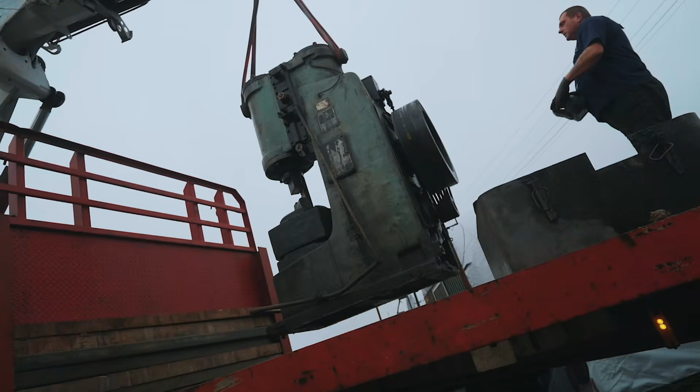In today's episode, I show you how I make and set up an anvil stand. We receive the new Russian Stanko. And you're gonna want to hang on until the end because we've got an incredible Christmas special from Will.

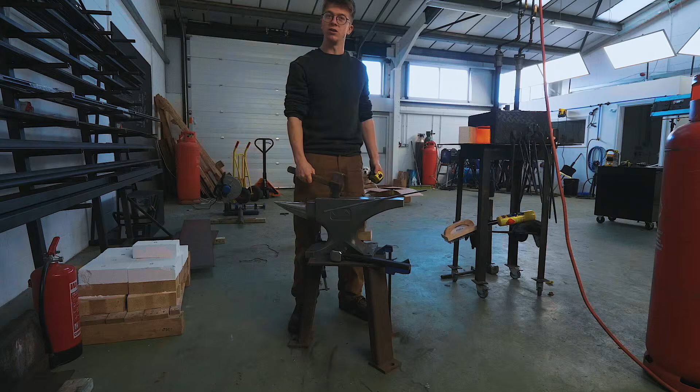As you can see, this stand wasn't designed for this anvil. It's actually way too low for me. But how do you know at what height you should have your anvil? Well, it depends on the work that you're doing.

If you're doing really heavy work, you're going to want the anvil to be a little lower than if you're doing light work. If I was wailing away on a really chunky bit of steel with a big heavy hammer, I might quite like it a little lower. But if I'm doing light work, I'm going to be hunched over a little bit too far.

There are a few general rules of thumb, which are putting your knuckles on the anvil face. For me, that would mean this needs to be lifted up a couple inches. And then when you're hammering, your arm is at nearly full extension, but still has a little bend in it.

Something I also think is quite useful is making sure you can put a bar of steel between your legs, because you'll frequently use your legs as a third hand when you're working. And if your anvil is too high, it doesn't go so good - if you hit the bar of steel, you're going to end up with some uncomfortable feelings. For me, the bar test works just great.

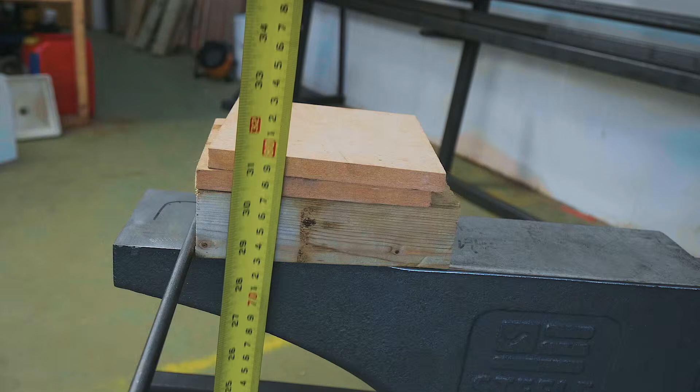And as a 5'8" chap, that means this anvil wants to be about 32 and a quarter inches off the ground, or 820 millimeters, which means we've got to make a stand that's 21 inches high. And so let's cut some steel and get going.

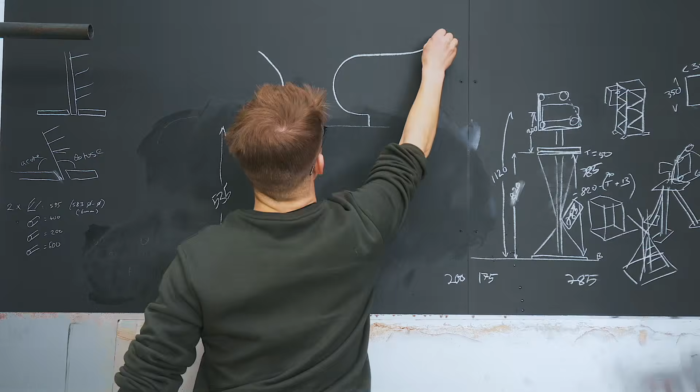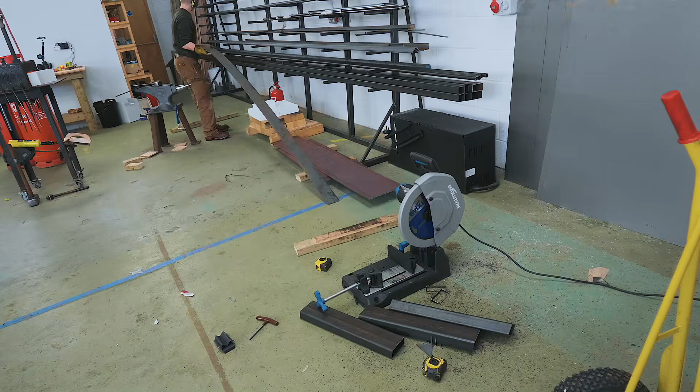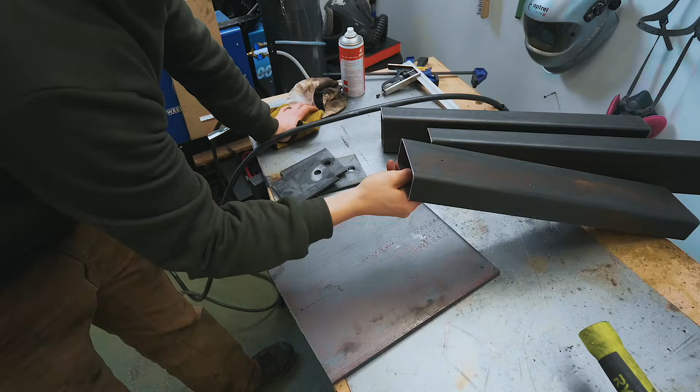Okay, so here's what we got. We have some rectangular tube, we got some flat bar, we got some 10mm plate. It's all quite simple from here.

We're gonna lay our legs in place. We'll tack weld on the sides first, that way we don't get any of this warping. We'll then weld it all around, flip it upside down, put the feet on it, and there's really not a whole lot to overcomplicate about this stuff.

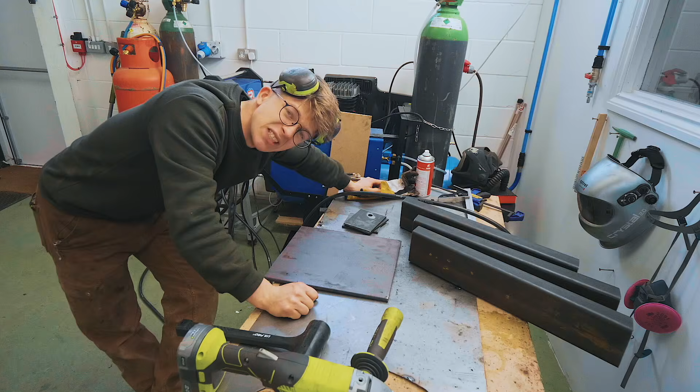I cut the legs at 12 degrees. If you struggle with maths, you can use a little calculator to work out what you need to cut it at. So here we go, we'll get welding.

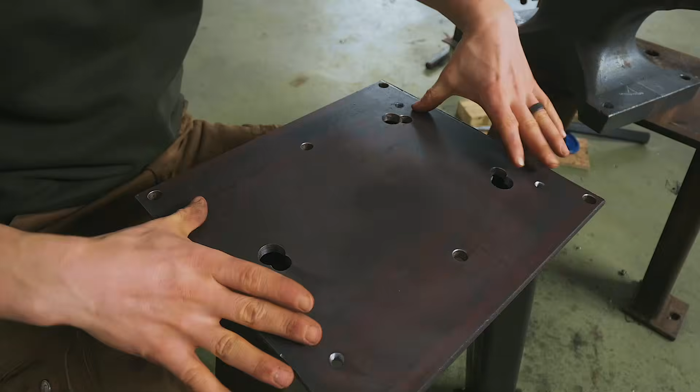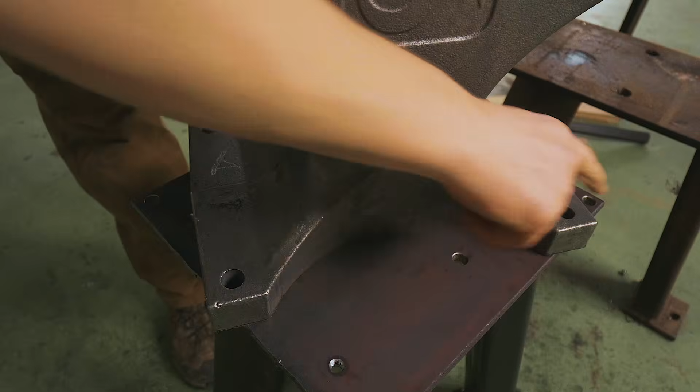Okay, so we have 4 threaded holes. We have holes for filling the legs with sand, which we have done. We're now going to put the anvil on it, but something to consider: one of the unique things about this anvil is obviously we have 4 mounting holes, but that means we're putting a lot of force through these feet, so it's important that it's on a flat surface.

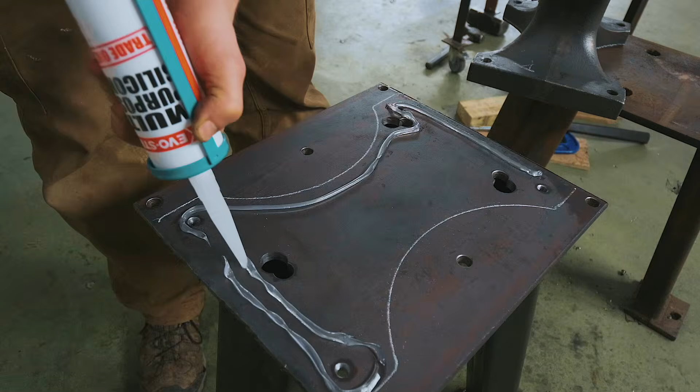From welding, this has picked up a slight arch, so I wanted to put some gasket paper down. The motor parts store was shut, so we'll just silicone the anvil down if we ever want to break it off. We'll heat up the base with the torch, and it'll be good to go.

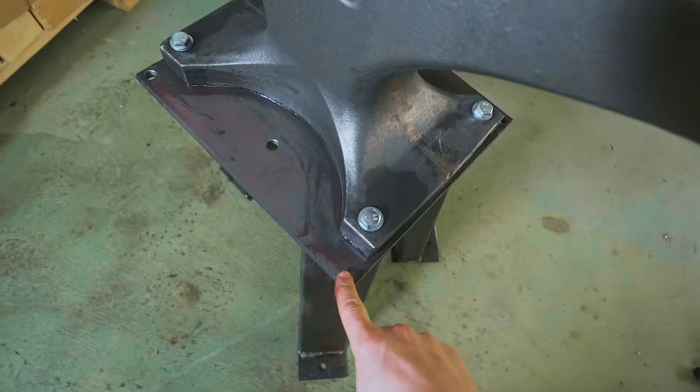Alright, we've got this stand looking rather nice. I'm quite happy with how it turned out. We're now going to get these holes put to use by making some racking. We're going to make a handy place to put some hammers, as well as a good spot for one of your brushes.

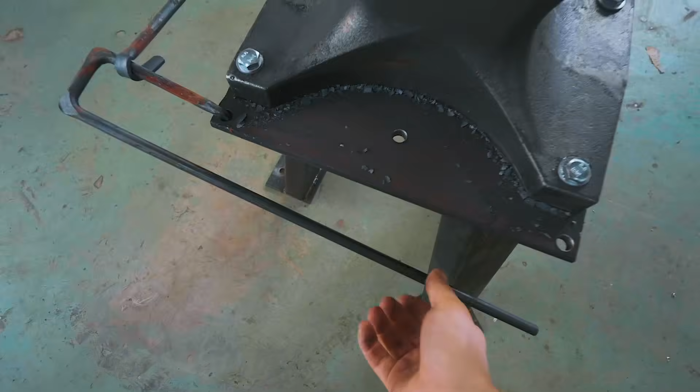Okay, so right now it is the next morning. This part of our anvil stand rack does need to get remade though, because somewhere I've miscalculated my maths and we've run out of material.

But there's something standing in the way of that. There is a big cast iron Russian lump of metal in the way of that, which isn't actually so bad. We've got the lifting equipment out, and that can only mean one thing - in a few moments, we should be having our Russian Stanko arriving on a truck.

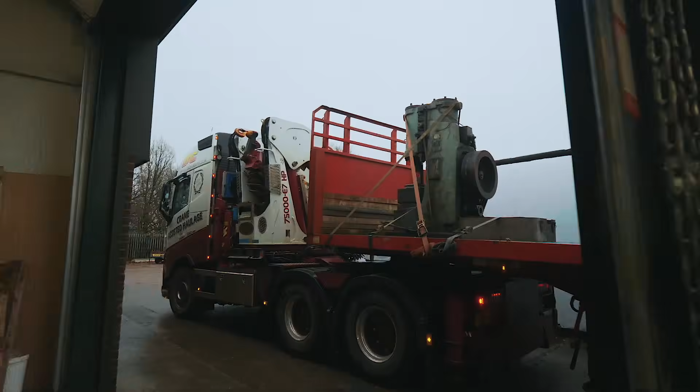Now, I thought the truck they sent last time was big. This one is even bigger, and it makes this power hammer look quite dainty and small in comparison.

So in the past, we've been able to crane things in through this door. We did it with the lathe. When I first ever moved into this workshop 3.5 years ago, that's how we did it.

What we're probably gonna have to do with this machine is drop it on the ground - hopefully not drop the power hammer. Too soon? Too soon. We're going to place it on the ground and then forklift it in.

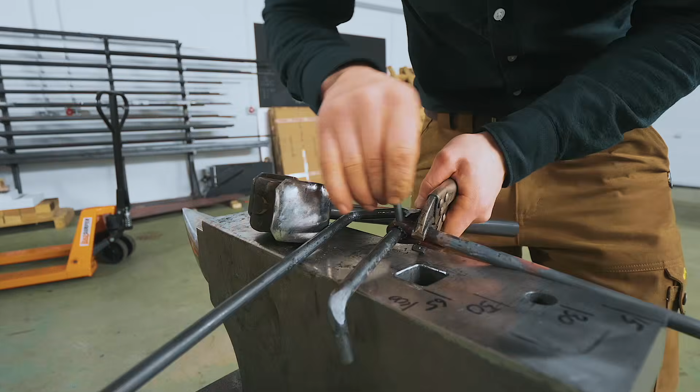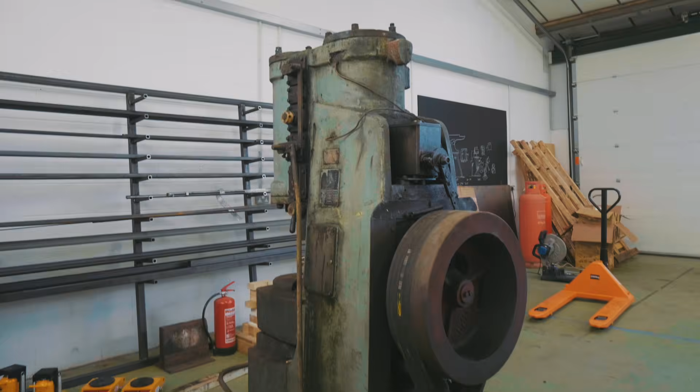Right, I've got to get this machine spun around and in place, because we're not going to be able to do much forging with our back to a steel rack.

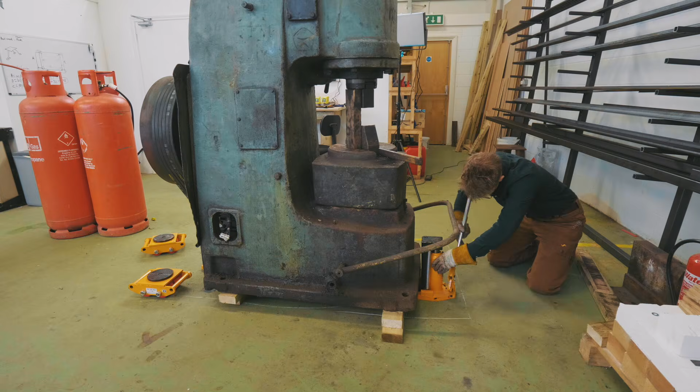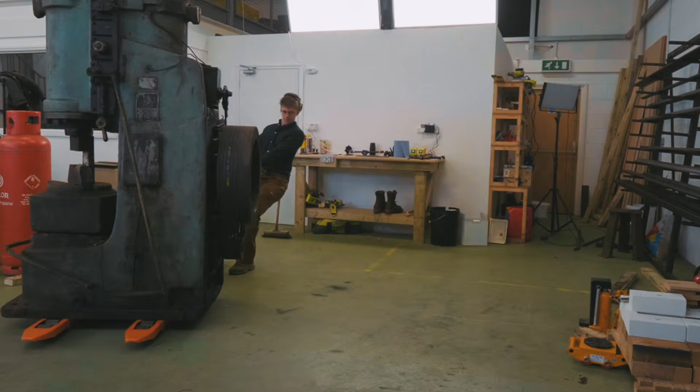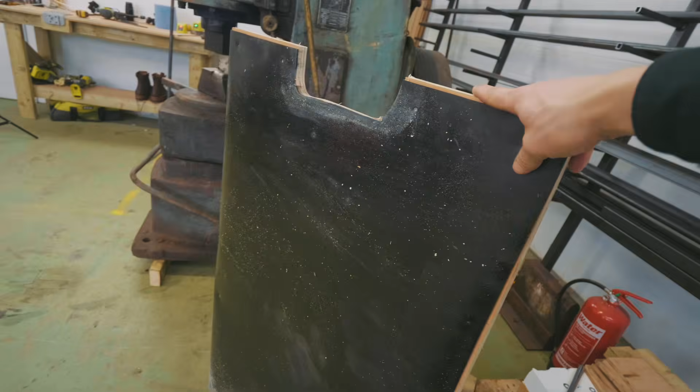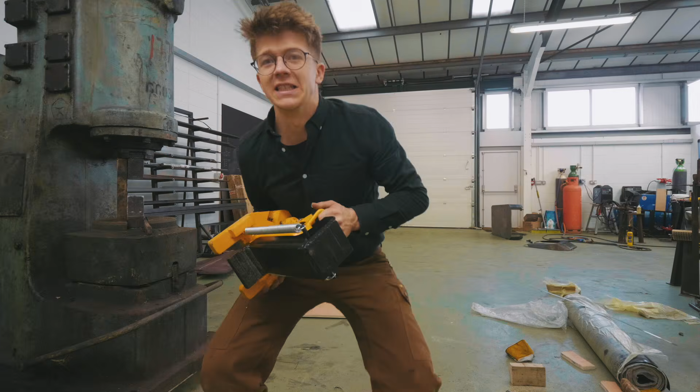So with the power hammer turned around in the right orientation, I've gone ahead and started making a little bit of planking for it. Now, you don't strictly need this, but the floor here has an epoxy coating that's really weak - it cracks, crumbles, very fragile on the surface, and I just don't want to make it worse. So we're going to use this plywood with a little bit of rubber underneath it between the concrete. It's got cutouts on it to accept a toe jack. It is my strong belief that every machine should have a way to get a crowbar or toe jack under it, so having a cutout in the base means we'll be able to get under there and lift it and move it when we need to.

There we go. We're on the ground.

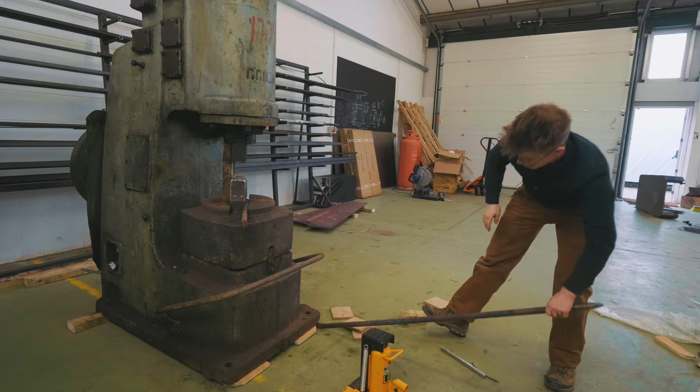Oh, what is this? Ah, good. Been waiting for this. This is exciting. Thank you, sir. Woohoo! Appreciate your help. Have a lovely one.

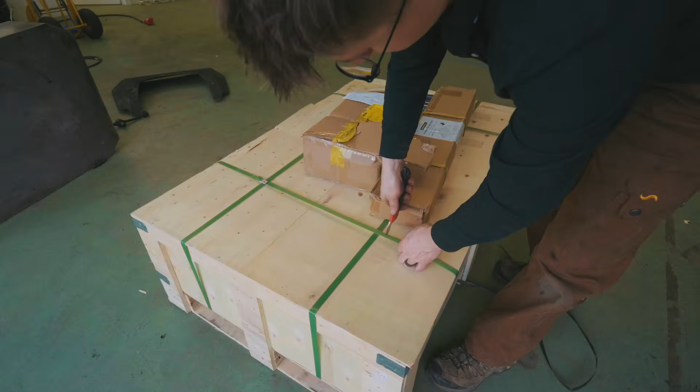So just as I get that power hammer finished up on the ground, this arrives. There is something magical in this box. All right, this is going to be a project.

Well, okay, I think I was being a bit of a drama queen - that wasn't bad at all. The trouble is, it's upside down. And here at the workshop it's only me and a dog, so guess who's about to do something silly?

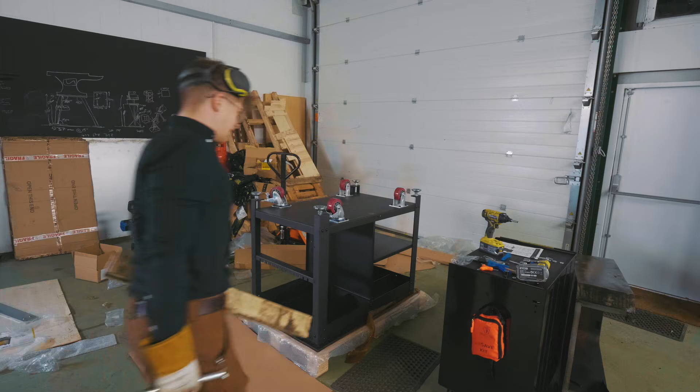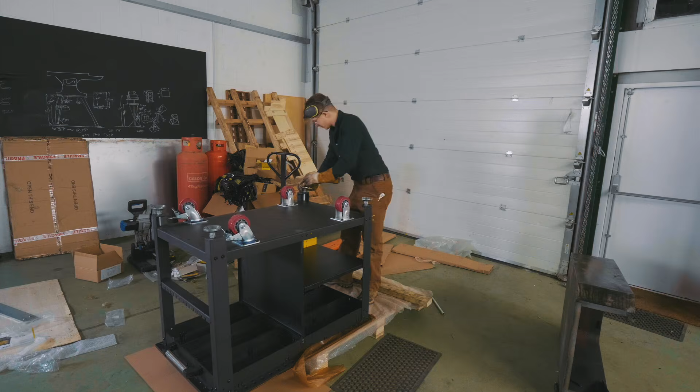Oh wow, everything in a metal workshop is just heavy. Oh, hello Yogo. I think she thinks it's stupid. Oh, I've got a little idea.

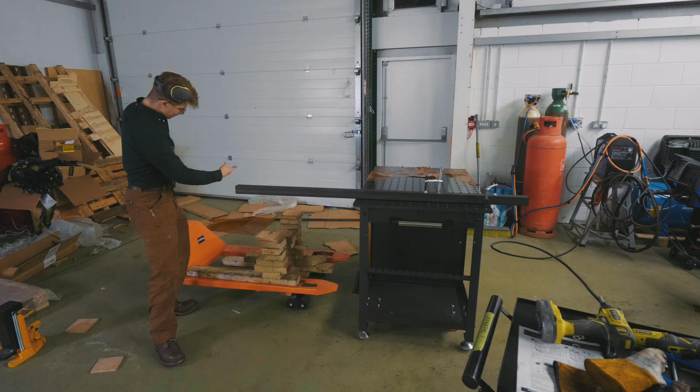It actually worked out great. I played Jenga with these very sketchy blocks, managed to not crush myself, then put this bar on it, clamped it using the table, and had myself a nice lever with which to gently lower the welding table.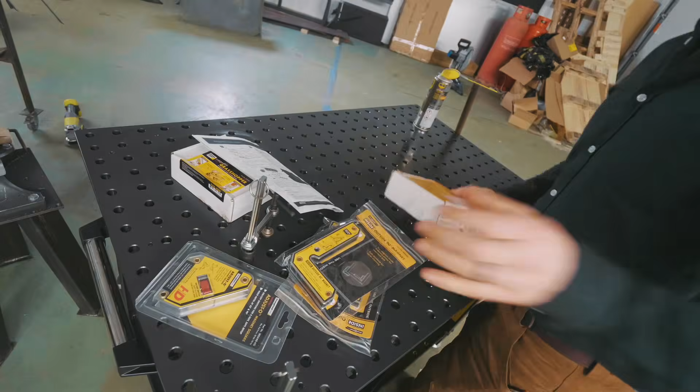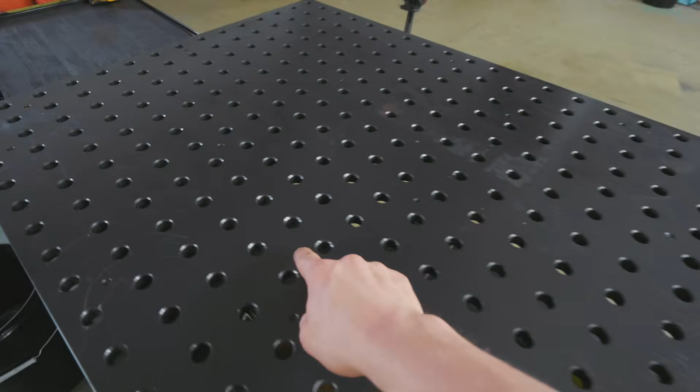These welding tables are phenomenal. It's called a Rhino Cart by Stronghand Tools. This is their metric version, obviously, since we're here in the UK. So it has 16mm round holes spaced 50mm apart. In the US, they're 5/8 inch round spaced 2 inches apart. Now, why do you want a table with a whole load of holes? Well, if you're a welder and you're the type of person likely to buy one of these tables, you know why - it's because of all the fixturing capabilities of having these precisely laid out holes. Not only can you clamp stuff, but when making parts, you can go ahead and set up 90-degree angles and all sorts of other fun things and turn this thing into an incredibly modular jig.

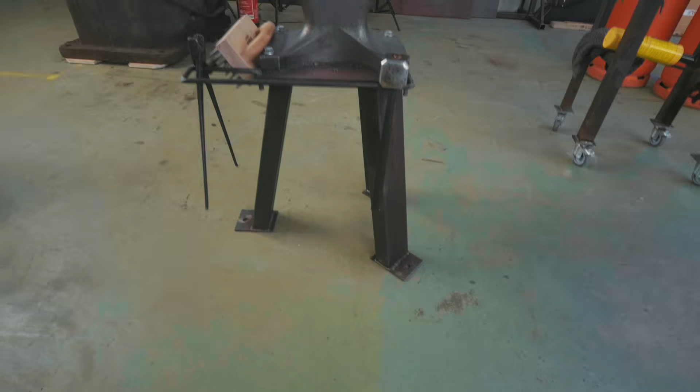Now, I'm very excited about all the tooling in this workshop, but I am giddy that I at last have another one of these tables, because after having used the one in Montana, I wouldn't want to be without it. It kind of seems like the table was the missing component in this entire workshop - well, the power hammer too, because now that I was able to get the table in place, I've made a lot of progress. It's helped me take that step toward moving a lot of things closer to their final position. We recently made this here anvil stand, and I want to make a little tool holder that fits in this hole.

We got all our steel cut, and it includes some steel for tools. We're going to make 2 punches and 3 drifts.

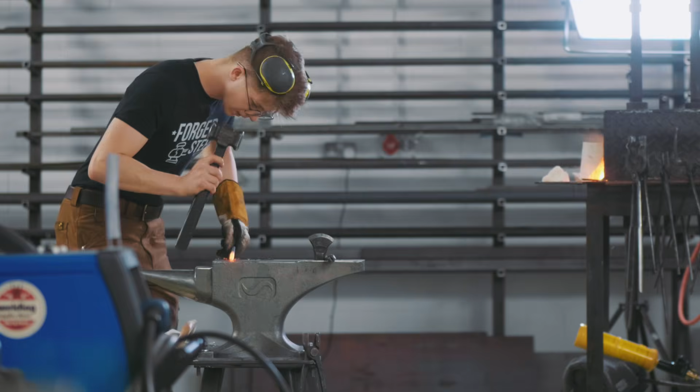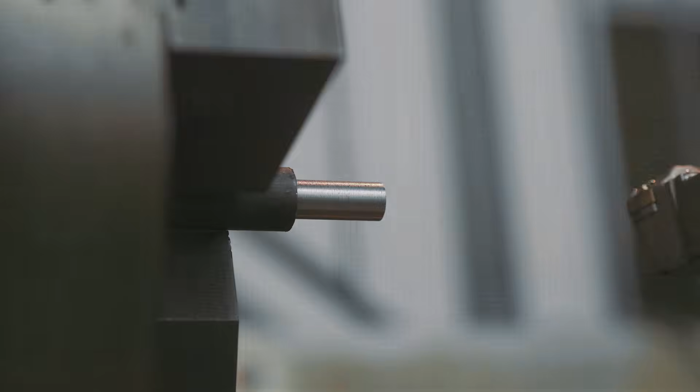We turned our upright on the Harrison lathe. It's now onto grinding the tools we made.

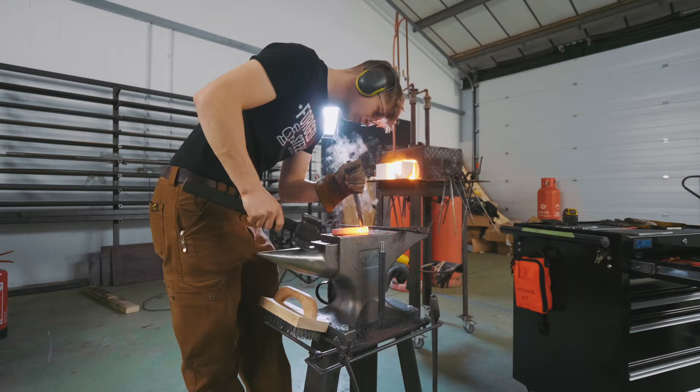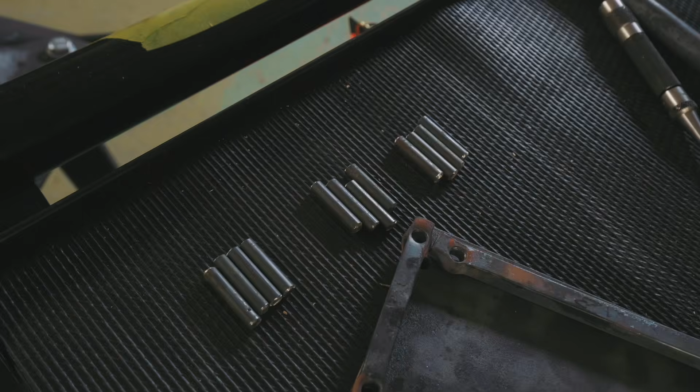Got all our holes put in. We have 12 bits of 6mm round cut. These are going to be our rivets, but since they don't have heads, I've got to make sure I have a spacer.

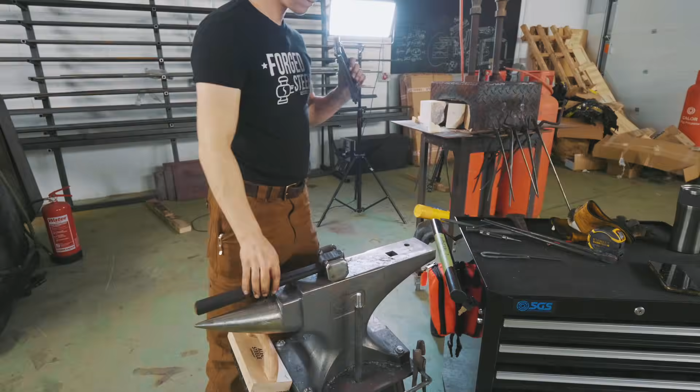Well, hey, there we go - that is exactly what I wanted. When you're working here at the anvil, you put your hammer down and then it falls on the ground. Here is a little tray that I can move around wherever I want. So that is a success.

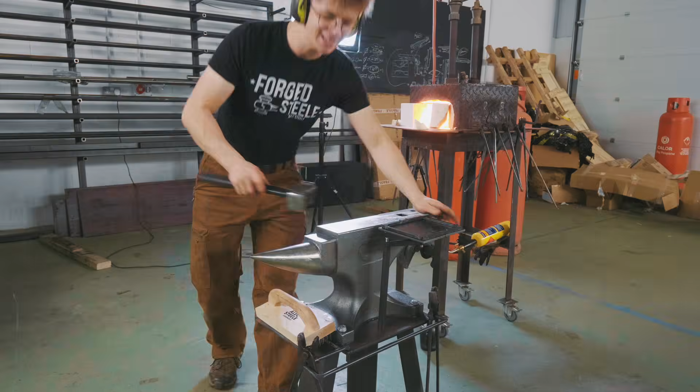And with that, it's back to the Montana shop for our Christmas special with Mr. Stelter.

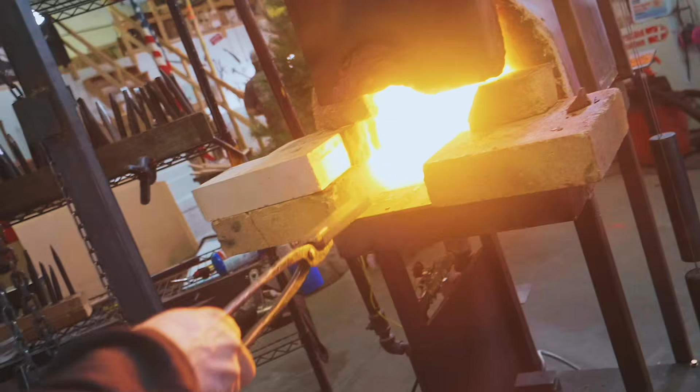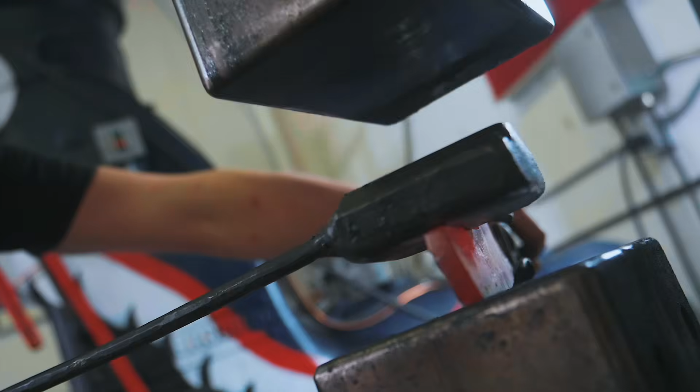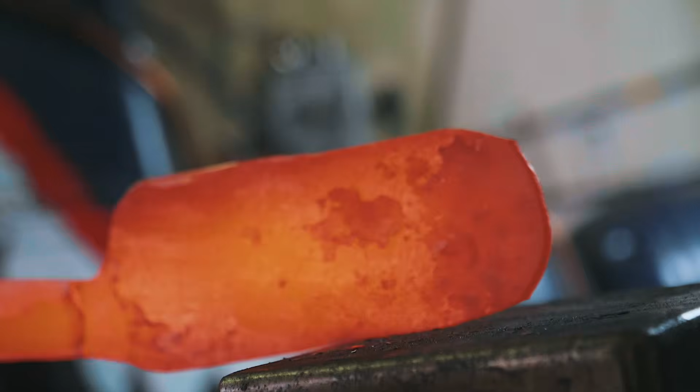'Twas the week before Christmas, and all through the shop, nothing was clean, not even the mop. The team sat in silence without a hint of glee, for the decor was barren, no star on the tree. When all of a sudden Will jumped to his feet, an idea blossomed, he grabbed paper sheet. Layer after layer, nothing would suit. He tried to embellish, but it just wasn't cute. So a wicked and dangerous ornament he'd make. To liven the spirits, the plan was high stake. Edges and bevels to sit high in the air, to the four corners of the shop, the joy it would share. From steel and fire, 5 points it shall need. It's not satanic, but could make you bleed. Perched way up high, 7 feet off the ground. If it falls your way, you may be hospital bound. Shiny and black, of knife and spear, whether you like it or not, it shall bring you Christmas cheer. The world's most dangerous Christmas star, to bring a holiday smile to those wide and far.

Ladies and gentlemen, welcome back to the workshop. In today's episode, we're going to be building the world's most dangerous Christmas star. That's right, because we're making it out of knives and we're putting it on top of a tree.

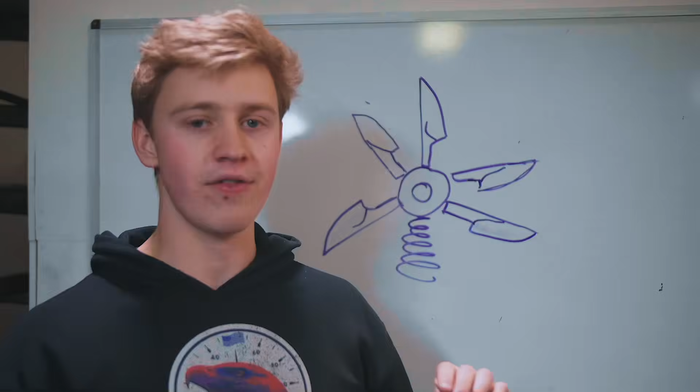So where we're at right now is I took 5 pieces of 1.5 inch thick by 2 inch wide by 5 inch long material, and I started forging my 5 knives out of them. I started breaking it down because obviously that thickness is way too much for a knife, so we started thinning it out and forging in our shape.

So now that we've got that stock broken down a little bit, we've isolated our handle, we're gonna go ahead and forge out our tips and forge down our bevels.

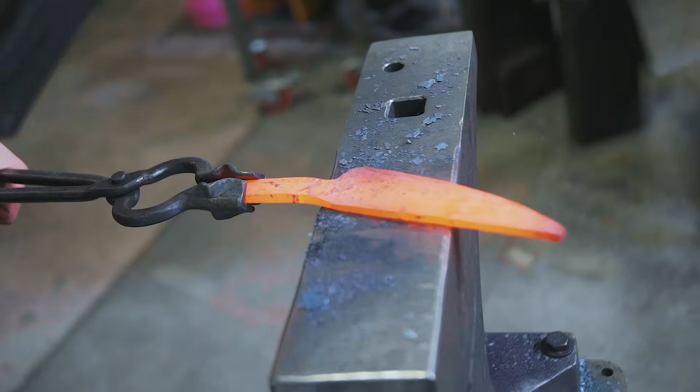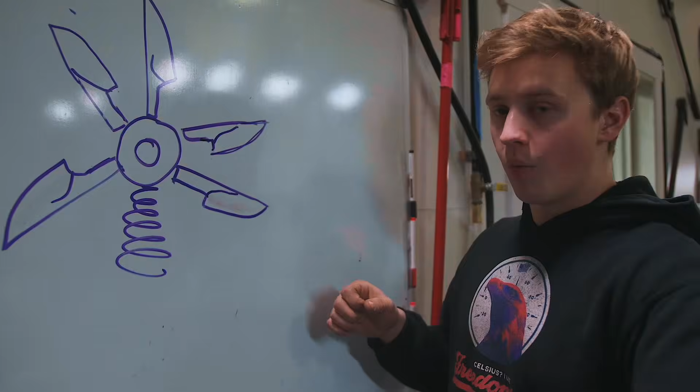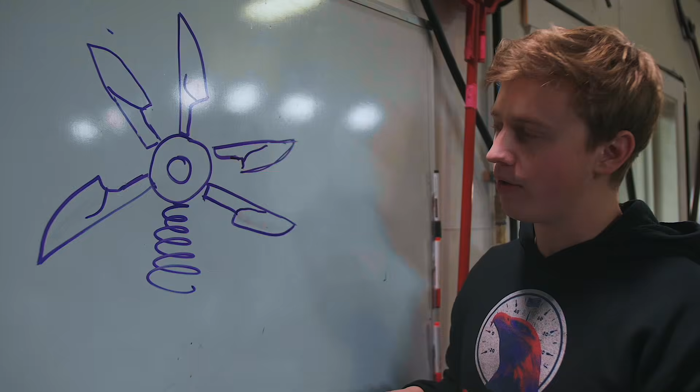Well, we've got our 5 knives forged out. They've got a nice profile to them, they've got tips, they've got bevels, they're looking good. And while the forge is still hot, we're gonna slice off a piece of 3 inch round stock. We're gonna punch a hole in the middle, and we're gonna make this nice looking steel donut that we're gonna weld all of our knives and our mounting system to.

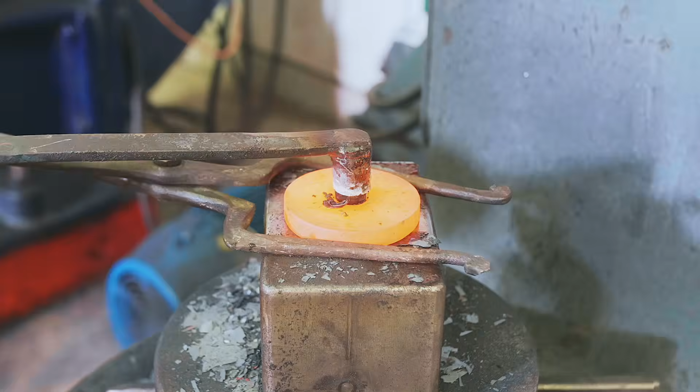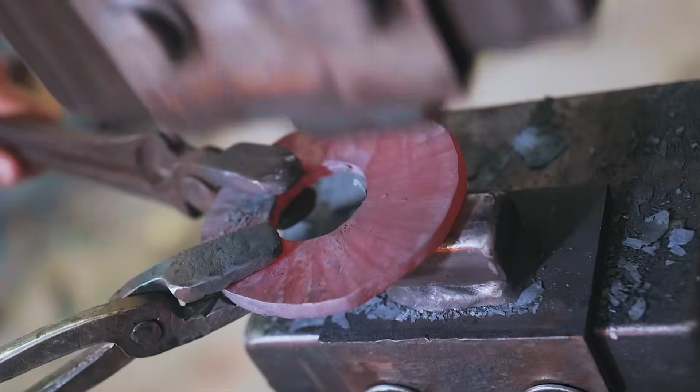All right, our Christmas steel Krispy Kreme centerpiece is now finished up, and we can now take our knives into the grinding room. We're gonna get the final profiles dialed in, make them look nice and aggressive for a chef's knife, get our bevels ground in, and then we're gonna get them nice and sharp, because it wouldn't be a dangerous Christmas star if these knives couldn't legitimately hurt you.

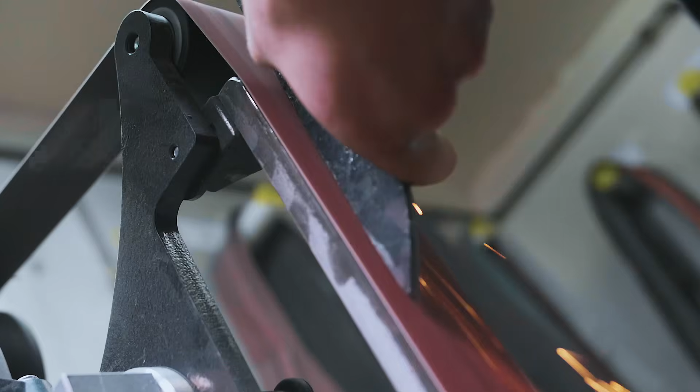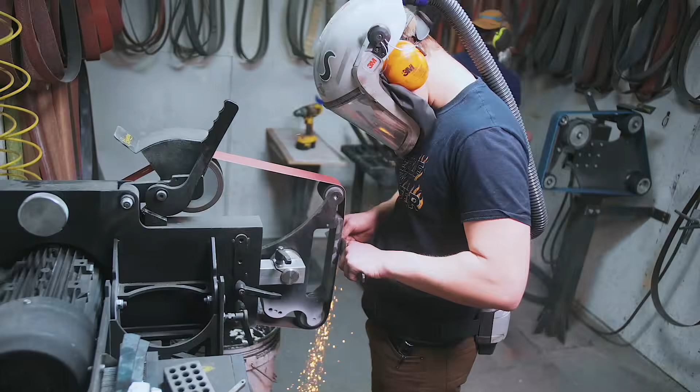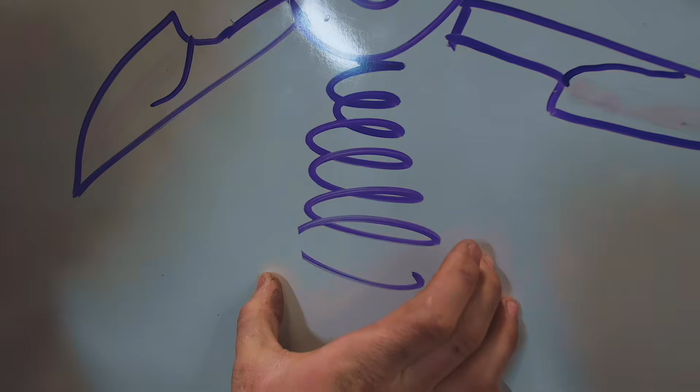Now we're gonna get the base for this thing wrapped up, both literally and figuratively, because we're gonna take a piece of 1/4 inch mild steel and we're gonna forge ourselves a tapered cone spring. I don't know how that's gonna work, but we're gonna make it happen.

This is actually pretty challenging. I wasn't expecting this to be a particularly hard thing to forge, but this coil does not really want to come together.

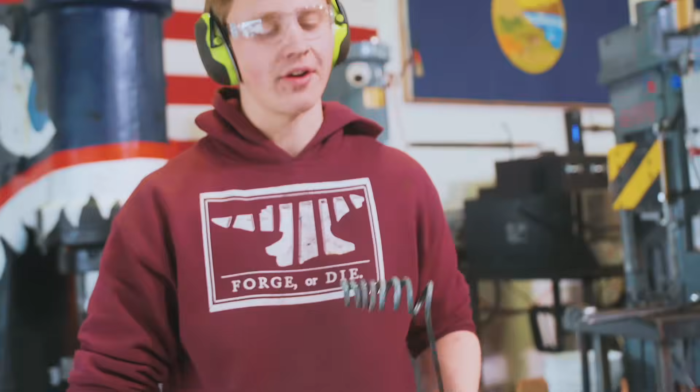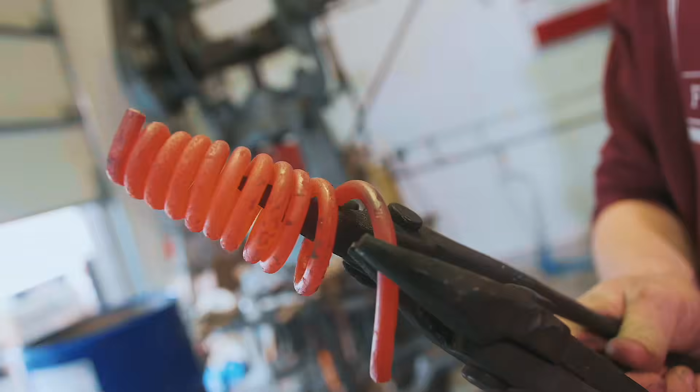I think that ought to do it.

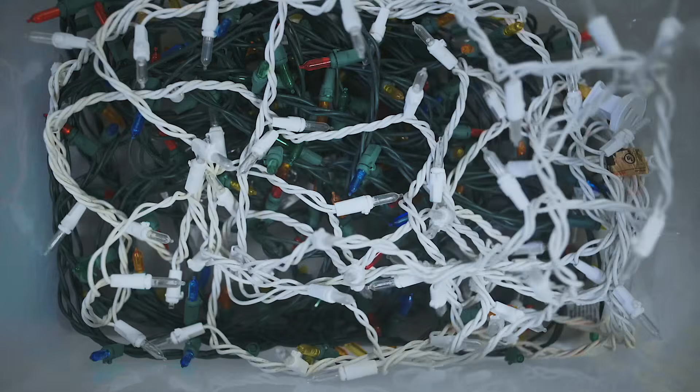Merry Christmas, everybody. I had a ton of fun getting to build the world's most dangerous Christmas star, and I found out that I have a gift for poetry as well. So come the new year, as I'm working in my own business, it's going to be 50% poems, 50% knives. That's not true, it's going to be only poems. Merry Christmas and a happy New Year.